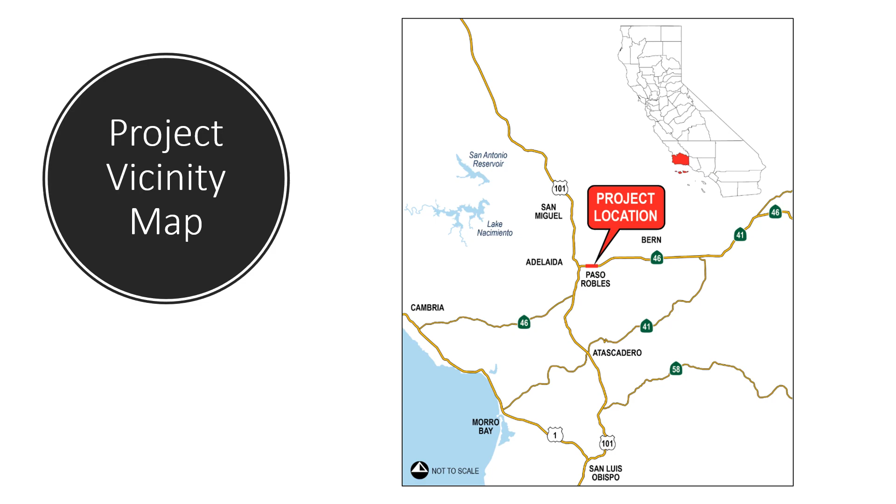The project limits and footprint cover the State Route 46 East Mainline corridor extending from west of the Golden Hill Road intersection and east through the intersection with Airport Road.

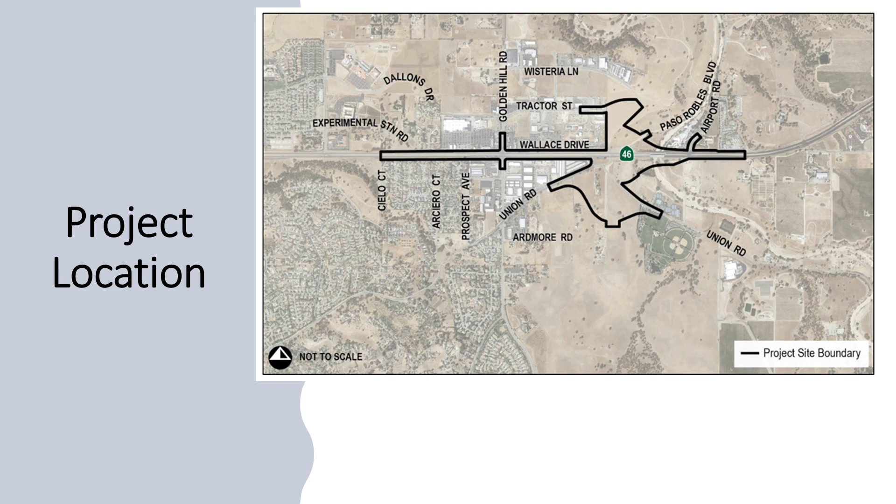This segment of State Route 46 currently carries an annual average daily traffic of approximately 25,000 vehicles per day through the project limits. Intersecting cross streets such as Golden Hill Road, Union Road, and Airport Road carry average daily traffic demands ranging from approximately 5,000 to 9,000 vehicles per day. The project corridor experiences significantly higher than average traffic demands during summer peak months, especially on Fridays and weekends.

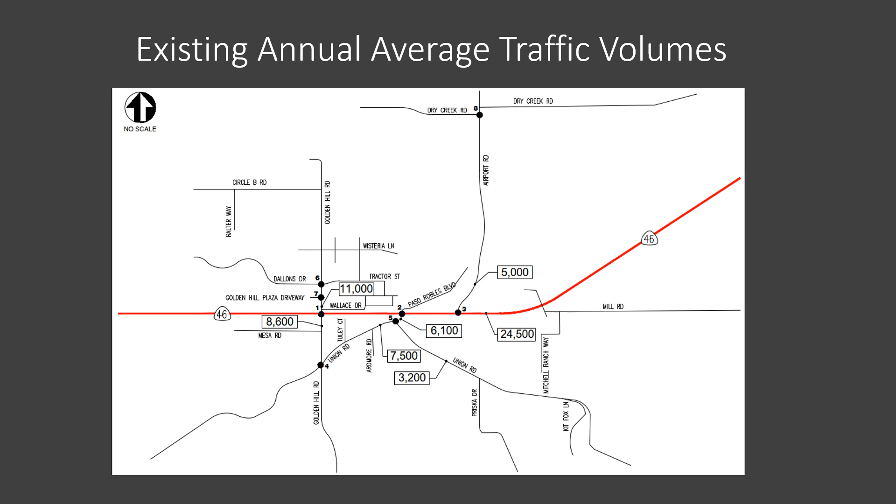State Route 46 intersections at Union Road and Airport Road are both unsignalized, side street stop-controlled intersections that experience degraded level of service F operations under weekday AM peak hour and weekday and Friday PM peak hour conditions.

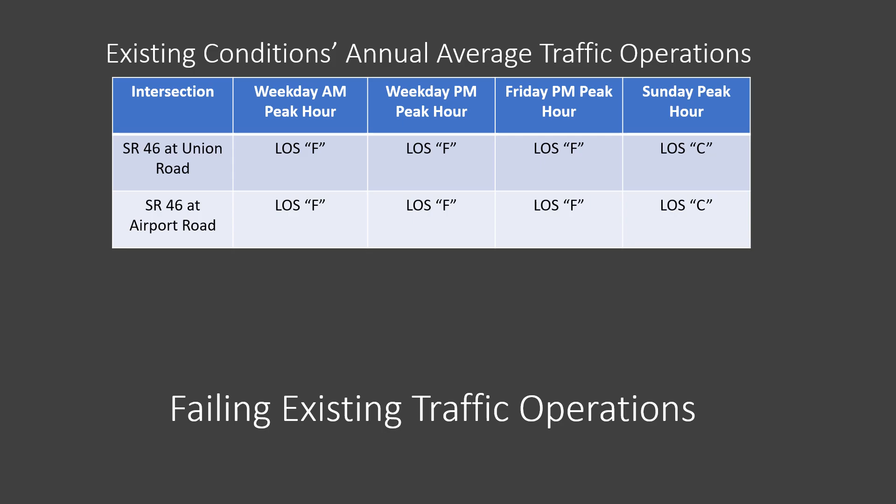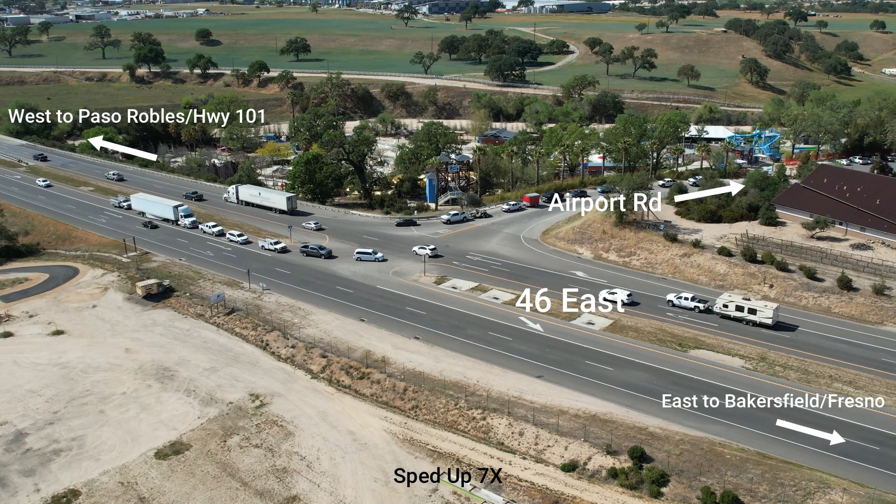This live video shows an aerial view of typical traffic operations and turning movements at the existing Airport Road intersection with State Route 46 East. Also, traffic operations at the nearby Union Road intersection can occasionally be seen in the distance. The video provides a good example of existing traffic flow within the project limits.

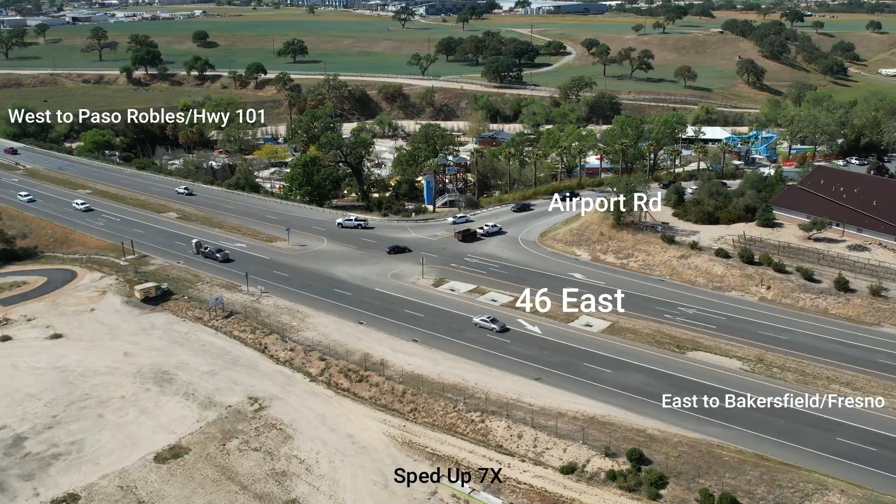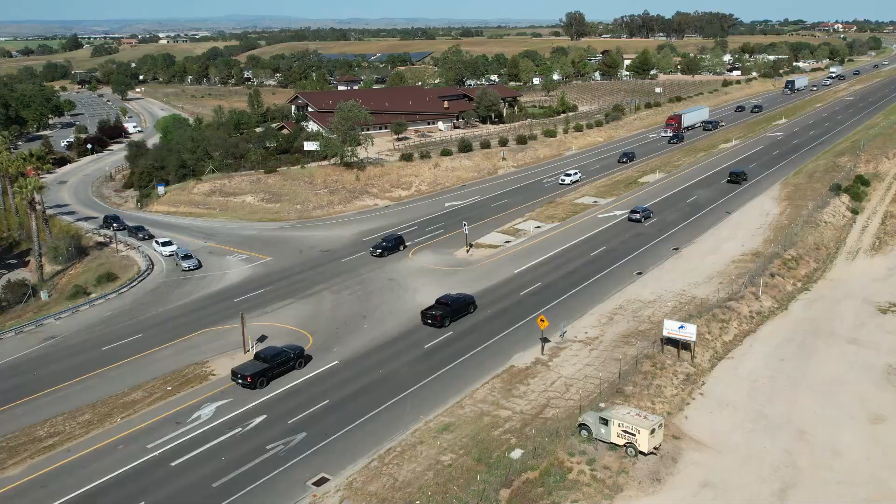The project intersections, as well as the mainline segment, currently experience collision rates that well exceed the statewide average for similar facilities. Speeding on the mainline and failure to yield at the stop sign controlled intersections are the most frequently reported primary collision factors.

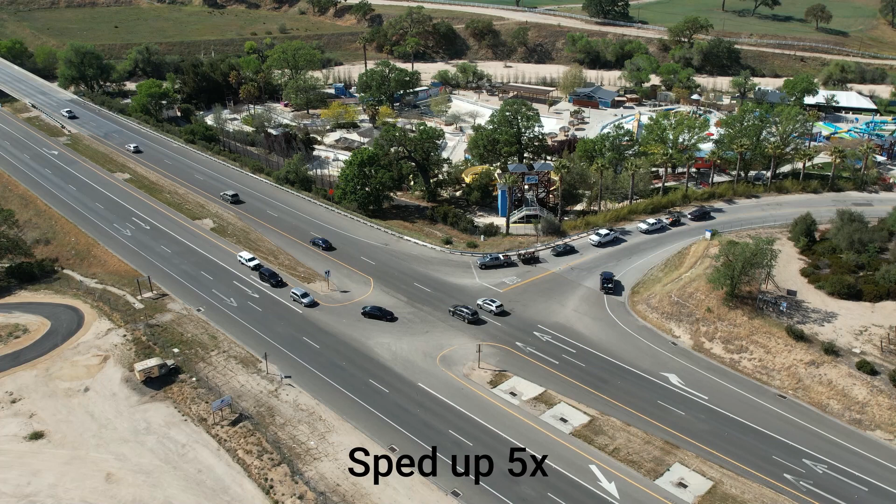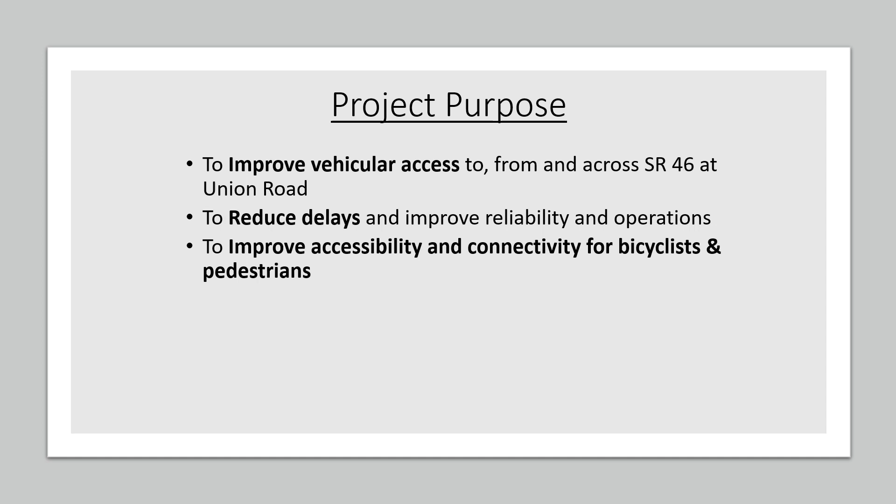The purpose of this project is to improve vehicular access, to reduce traffic delays, and improve accessibility and connectivity for bikes and pedestrians. The need for this project is driven by existing limited access and connectivity across the State Route 46 corridor. The existing at-grade intersections experience high traffic delays, and there is currently a lack of multimodal connectivity across the project corridor.

The project approval environmental document process has identified a single build alternative for the project that would be constructed in 2 phases. Phase 1 would entail construction of a new overcrossing for Union Road at State Route 46 and local street connections to the overcrossing. Phase 2 would expand the overcrossing to a full interchange with construction of State Route 46 directional ramps.

As depicted in this high-level illustration, the proposed Phase 1 improvements include a new Union Road overcrossing at the State Route 46 intersection, realignment of Union Road, and construction of a Union Road connector from State Route 46 eastbound. They also include right turn only access restrictions at the Airport Road intersection, roundabouts at the Union Road extension intersections, and construction of a mainline median barrier through the project limits.

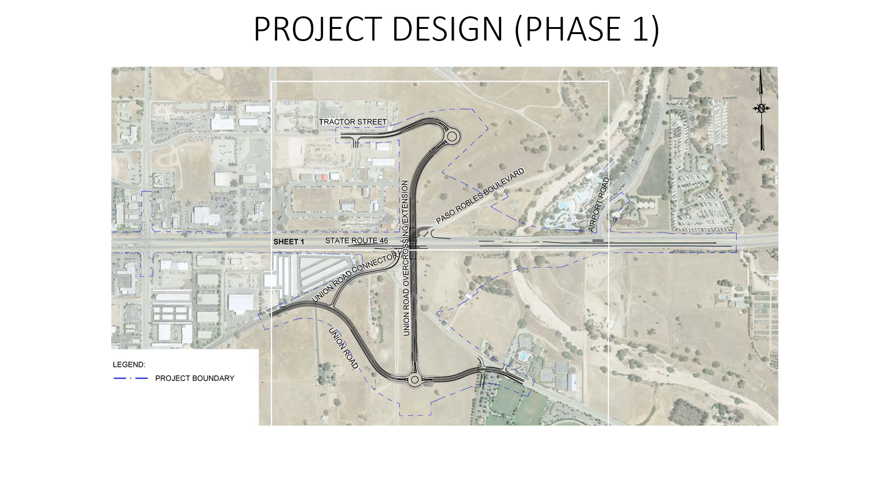This pictorial simulation illustrates the 2-lane Union Road overcrossing proposed in Phase 1.

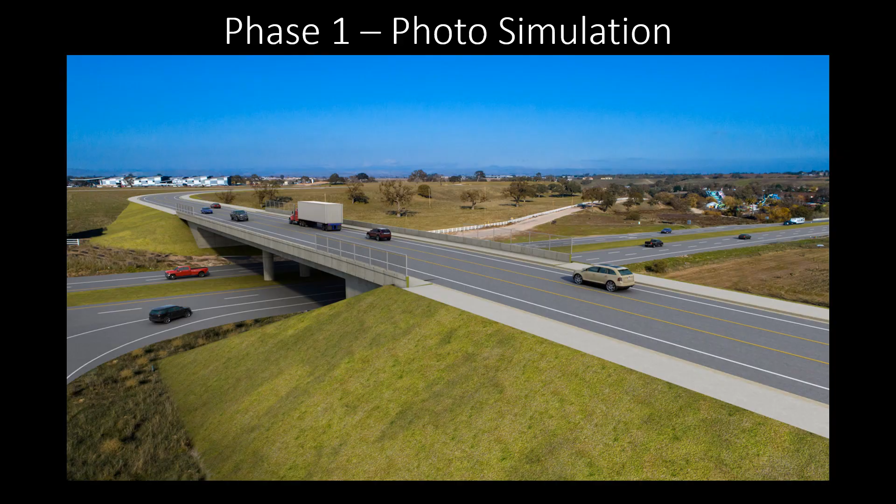The proposed Phase 2 improvements are the final phase of the project. As shown in this high-level illustration, the Union Road overcrossing would be expanded to a full interchange with construction of directional State Route 46 ramps. A westbound collector distributor system would also be constructed, which would result in right turn only access restrictions at the State Route 46 and Golden Hill intersection. The State Route 46 and Airport Road intersection would be fully eliminated in Phase 2.

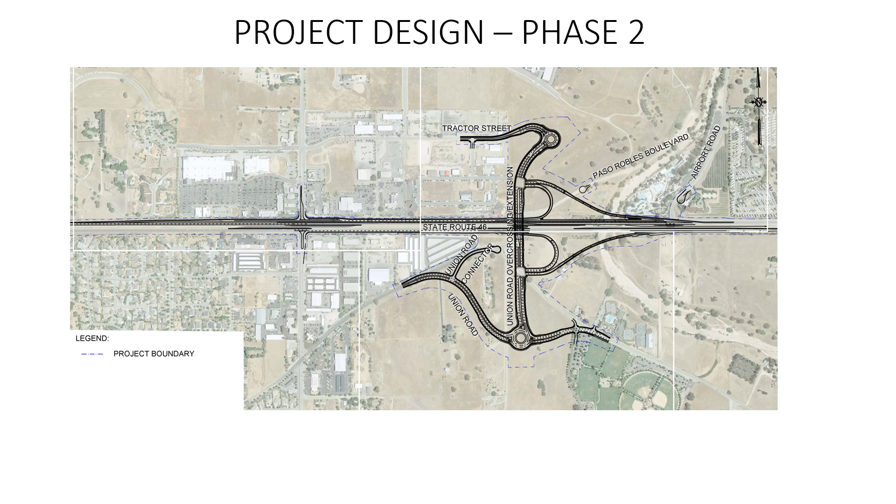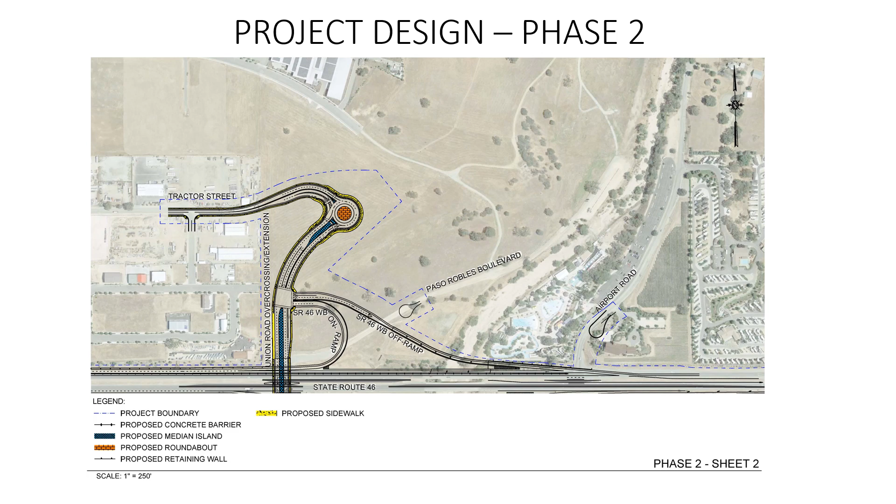As depicted in this more detailed illustration, directional westbound ramps would form a signalized ramp terminal intersection on the north side of State Route 46, to the south of the Tractor Street roundabout intersection. Also, in Phase 2, directional eastbound ramps would form a signalized ramp terminal intersection on the south side of State Route 46, to the north of the realigned Union Road roundabout intersection.

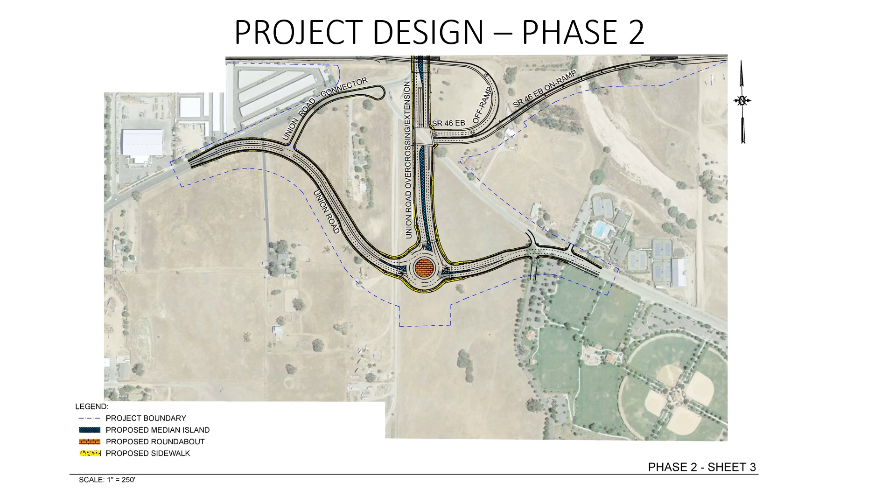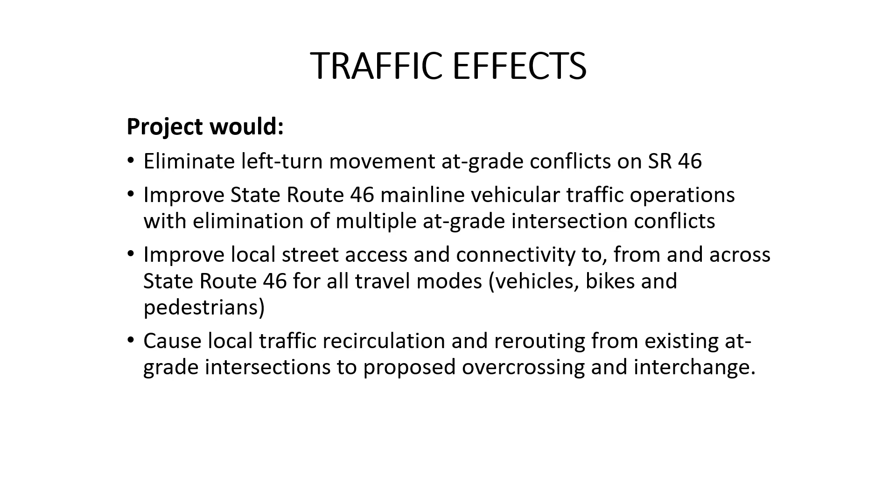The traffic-related operational effects created by the build alternative include elimination of left turn conflicts at the existing unsignalized at-grade intersections, improvements of mainline traffic operations, enhanced multimodal connectivity, and rerouting of traffic from existing at-grade intersections to the proposed overcrossing and interchange. From a traffic operations standpoint, with completion of Phase 1 improvements, the existing at-grade State Route 46 intersections at Union Road and Airport Road would improve peak hour operations to level of service C or better conditions. With completion of Phase 2 improvements, all existing mainline at-grade intersections within the project limits would be effectively eliminated.

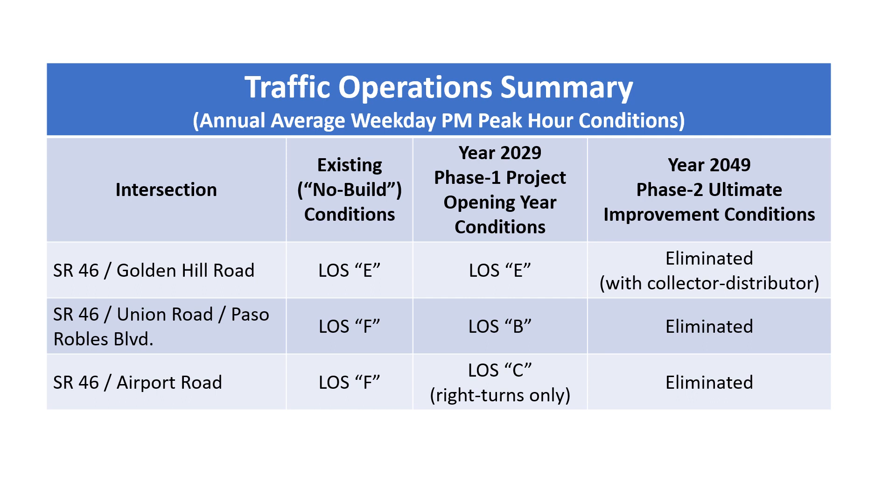Caltrans and the city prepared a draft environmental document, which consists of a joint initial study and environmental assessment in compliance with the California Environmental Quality Act (CEQA) and the National Environmental Policy Act (NEPA). This document analyzes and discloses environmental effects and is supported by a range of detailed technical studies. Avoidance, minimization, and mitigation measures are provided to reduce potential impacts associated with the proposed project.

The draft environmental document concluded that the build alternative would not result in significant adverse effects on the environment under NEPA. Impacts under CEQA would be less than significant with mitigation. Caltrans intends to adopt a mitigated negative declaration under CEQA and a finding of no significant impact under NEPA prior to final project approval. Six key views within the project area were included in the draft environmental document's visual analysis to determine the potential effects to visual resources.

The build alternative would increase the visual hardscape within the project area. However, landscaping, aesthetic treatments, and contour grading with slope rounding would minimize visual impacts and are included as CEQA mitigation measures.

Land acquisition would be required for both phases of the build alternative. Temporary construction easements are required for access and staging, and permanent land acquisition would be needed for new right-of-way. Implementation of the build alternative would require the relocation of one business and one residence. The project would comply with the requirements of the Uniform Relocation Assistance and Real Property Acquisition Policies Act of 1970, and provide property owners with just compensation and fair market value for their property.

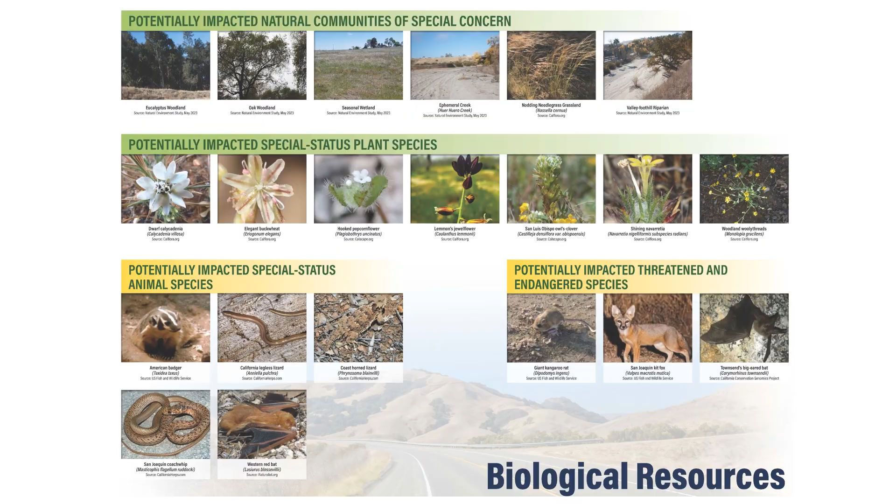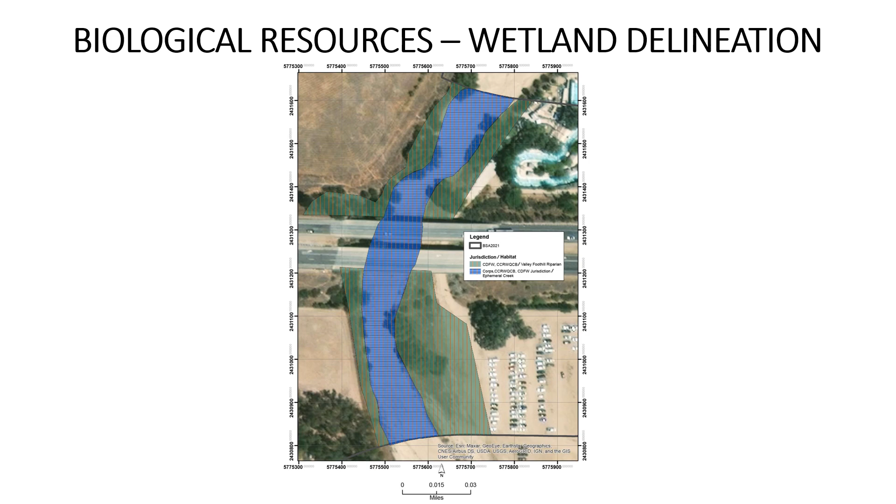The environmental document analyzes potential impacts related to cultural and tribal cultural resources per CEQA, NEPA, and Section 106 of the National Historic Preservation Act. The build alternative would adhere to the requirements specified in the project's programmatic agreement and cultural resources management plan.

Construction activities have the potential to impact the Johnson House, which is eligible for listing in the National Register of Historic Places and the California Register of Historical Resources. Impacts would be minimized through the implementation of a vibration monitoring plan and the limiting of vibratory and static rollers. As requested, Native American tribal representatives would be invited to monitor construction activities.

Barney Schwartz Park, Almendra Court Trail, and the Johnson House were determined to be subject to the provisions of Section 4(f) of the Code of Federal Regulations. The Section 4(f) determination for Almendra Court would be no use. Caltrans made a finding of no adverse effect for the Johnson House in accordance with federal regulations.

The California State Historic Preservation Office provided concurrence. De minimis impact determinations for Barney Schwartz Park and the Johnson House were made in the project's draft environmental document. This figure depicts the project study area with identified resources subject to Section 4(f) and Section 106.

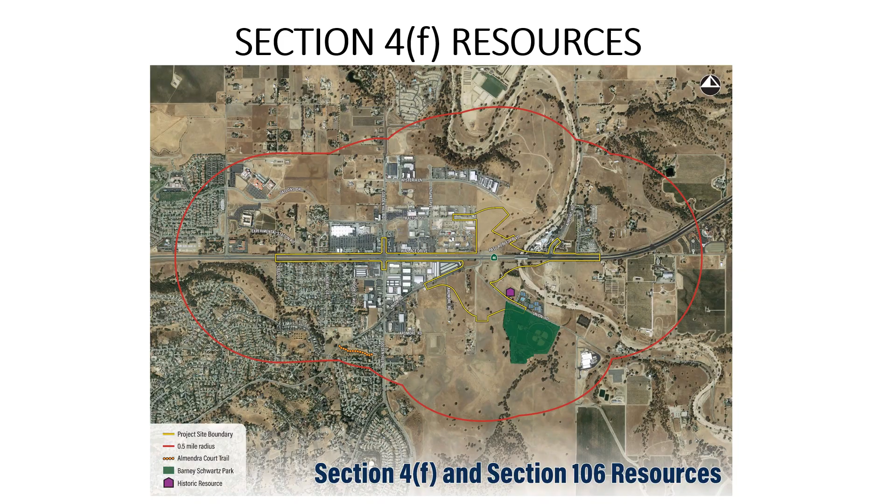The City of Paso Robles is the project's proponent and funding applicant. Caltrans is the lead agency for both NEPA and CEQA approval. SLOCOG is the regional metropolitan planning organization assisting the city with project funding.